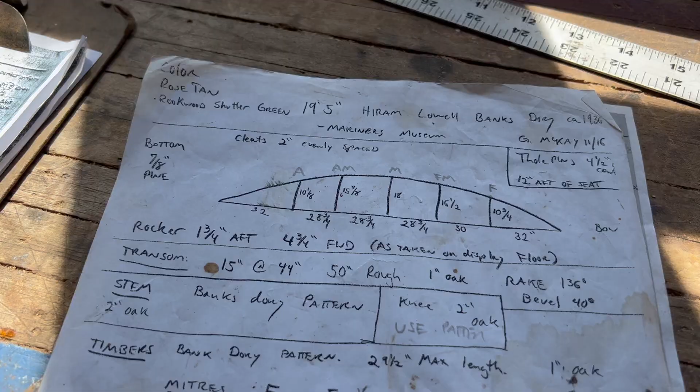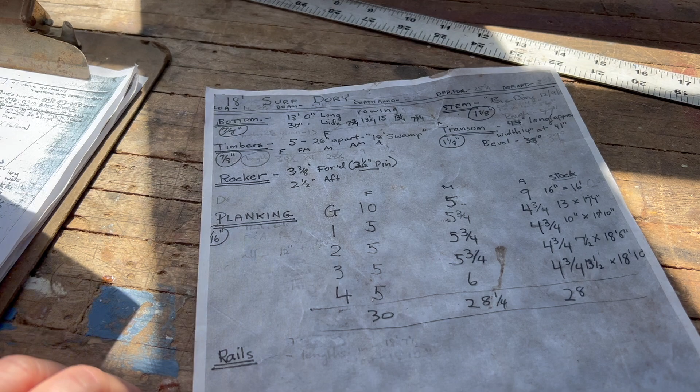A typical sheet full of notes. This is one that I made for a Banks dory. That's one for a surf dory. That's a little bit more like it. There's not a lot there if you're going to build a boat, but all of our in-house design boats are all flat bottom, and they're built the same way. So you start with a bottom.

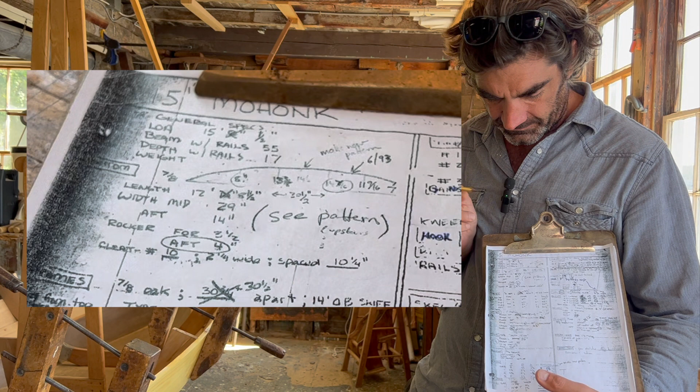Here, it gives you the general specs, length overall, 15 feet. Used to be 15.2, but somebody crossed it out. Now it's 15.5 inch. But there's a Mohonk pattern, it says here. So you don't even have to worry about this. You can go to our little pile of patterns and find the bottom pattern for a Mohonk skiff, which we can go do in a minute if you want.

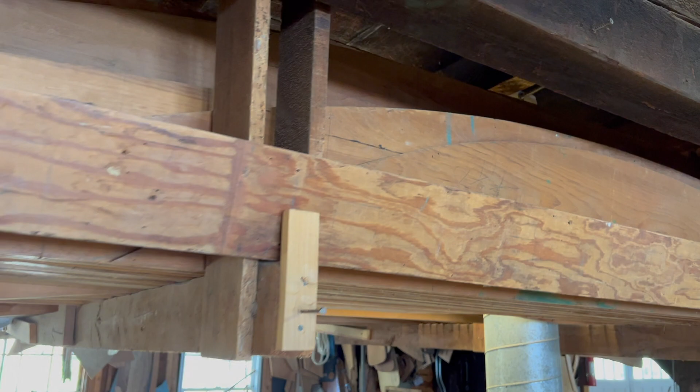But if you can't find that pattern, which is quite possible, you can lay it out here. It gives you the stations, the distance between, and a distance out from the center line. So you can lay out a center line, lay out your 30.5 inch between each station, come out the half breadth, bend a batten, and now you got yourself a bottom. Pretty straightforward. Tells you bottom is 7/8,

and your length. They gave you your length already. Your length is 12 feet. Sorry, I'm reading it upside down. 12 feet and a half inches. Your width at midships is 29 inches, and your width aft is 14 inches. Then it has, this usually comes later, but your rocker forward is 3.5, aft is 4. That's actually quite a bit of rocker, I would say, for one of these boats.

And that means this bottom is curved fore and aft this way. So you're going to take the bow and bring it up 3.5 inches from the baseline, which is the building bed. And then the stern, you're going to bring up 4 inches from the building bed. The middle is going to touch the building bed, and when you spring that in, that's your rocker.

Frames, they're going to be 7/8 inch oak, 30.5 inches apart. And then it says 14-foot OB skiff. So that means at some point they built a 14-foot outboard skiff and they developed a frame pattern for that. And so you're going to go over to our pile of frames on the wall. You're going to grab 14 OB skiff, and you're going to lay out a forward timber, a mid 1, a mid 2, and an aft timber.

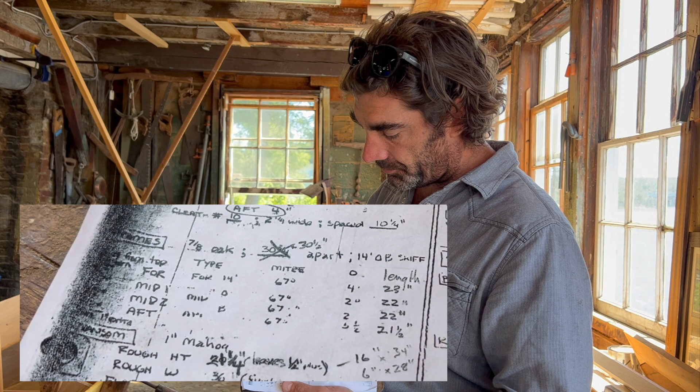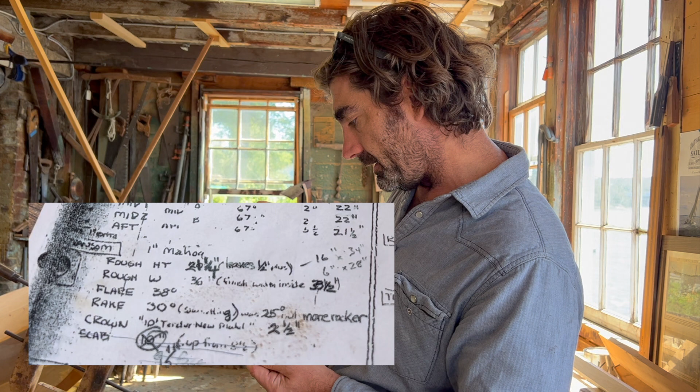And this gives you a little bit of spec on that. Lengths. It even gives you a bevel to put on the bottom so that these frames are canted out from center, so that when you bend the rocker in, they actually come back up to plumb. And then the transom. It gives you 1-inch mahogany, gives you a rough height of 20.75, a rough width of 36. So you need roughly that much width and that much height on it.

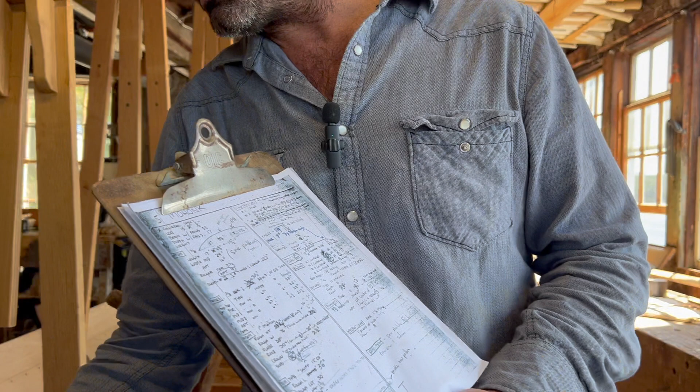Flare, 38 degrees. So the flare is this angle that runs out from the bottom up the side, at least for the garboard anyway. Out from the bottom, up from the side. There's your flare. And then it gives you the rake, 30 degrees, which is the angle that the transom is tipped back, is 30. And then it gives you a crown, 10-foot tender, new pattern.

So that means we actually have crown patterns for the shape of the top of the transom over on the wall. So that's what you're going to use for that curve. And again, these boats are meant to all look the same. If I were building one of our other designs, this information wouldn't necessarily be there. I'd have to figure out what pattern I wanted to use, and that would have been to my eye. And to that end, when I see boats that were built here in the 70s and 80s and even 90s, I can tell who built them, usually from the little details like that.

Stem type: skiff, 14-foot OB. So now we're back to that outboard skiff again. We're going to go find the stem pattern for that, which hangs on the wall over there. It's got a rough length of 36, a rough cut of 30.

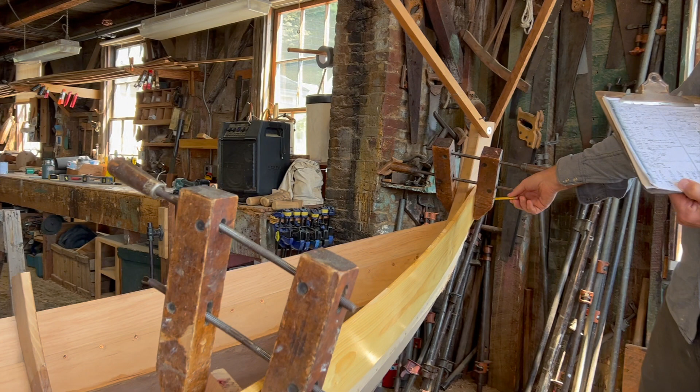So that rough cut of 30, and again, we're going through a lot of information. You come up 30 inches from the bottom and you make your first cut, and that is going to be your bevel for your planks to that point, and then you custom fit the shear plank when you go to put that on. So 30 inches is going to leave you below the shear a little bit.

Planking, 9/16 cedar. Well, that's high hopes. Can't find cedar like that anymore, so we're making it out of pine. 1-inch laps, 24-inch gain. Lining. Now, this is the magic. This little guy here is our lining for middle aft.

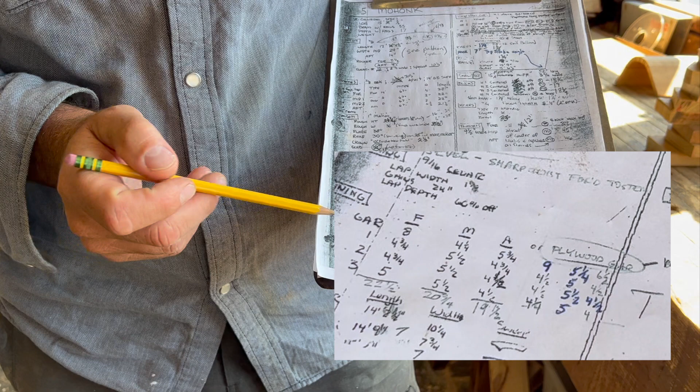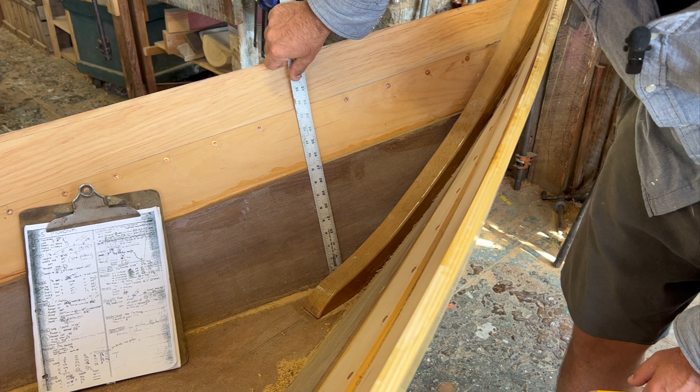You get all these numbers. Then you have plywood garboard, a whole different set of numbers. In our case, we're using a plywood garboard. And so if we take our little yardstick here, we should be able to read plywood garboard, 9 inches, and that's forward. So this right here should be 9 inches up from the bottom.

If we go to the middle part of the boat, 5 1/4, this measurement here should be, fingers crossed, 5 1/4. And then if we go aft, 6 1/2. I'm going to presume John did it right because he's good like that. 6 1/2. So then that gets you 3 points to make the top edge of your garboard. The bottom edge is determined by tracing the bottom of the boat.

Your next plank comes up, it overlaps everything. You trace the top of your garboard, and then you just add. So in this case, the next plank's 4 1/2 inches wide up forward. I'm going to add 9 and 4 1/2. It's going to get me 13 1/2. Lo and behold, 13 1/2. Sticking with the same one, another 4 1/2 would get me to 18 inches. 17 1/2, I hope. And 4 1/2, 4 1/2, 9.

So this one ended up a little bit low, but that's not a big deal. Actually, it didn't if you put it at the proper angle. But that doesn't matter because that's why I add to the previous number so that it's self-correcting all the way up. And then when you get to the shear, you get your 3 points. And you always try your shear line out a couple of times before you actually make it to make sure that it actually looks good on the boat.

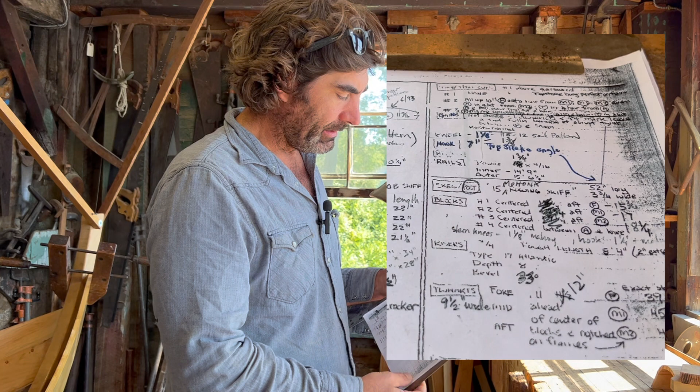So now you've got your boat all planked up. Pretty easy. There's a whole mishigas of timber cuts here, and we've sort of gone through that, and I'm not going to go through that again, just because in this particular boat, it's quite complicated. And then it gives you a whole bunch of information here on how to do the rails, how to do the rowing blocks, the risers, and all that kind of stuff. Again, that stuff typically does not exist on these. It's just so these boats all look the same. But the general gist of how to build these boats is all in those notes right there.

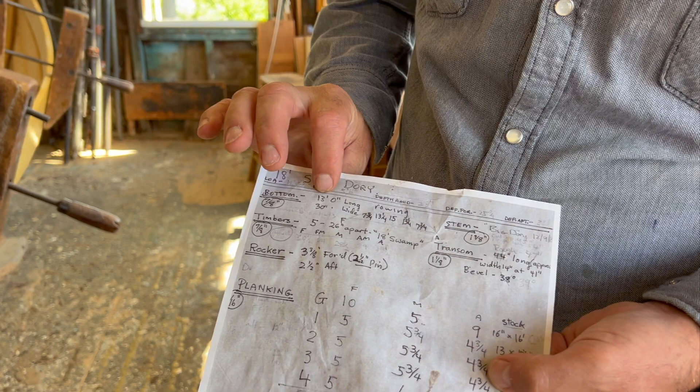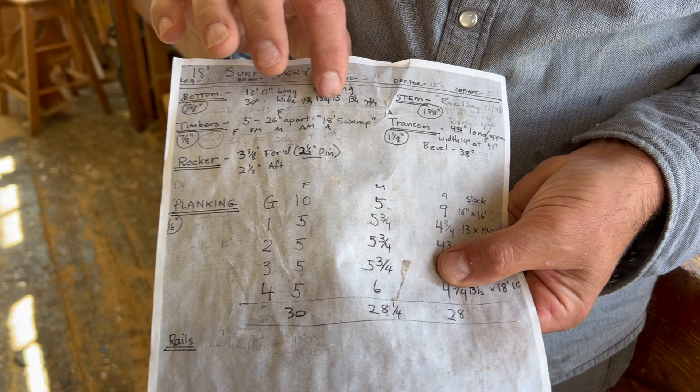And so in the case of our 18 surf dory, we would know that the bottom was 13 feet long and 30 inches wide. It's really all you need to know because it's football shaped. So at 6 1/2 feet, you come out 15 inches on either side, and there you got your shape of your bottom. Your stem is the big dory stem. Your timbers are 18-foot swamp. You've got 5 of them. Just follow the patterns, and there you go.

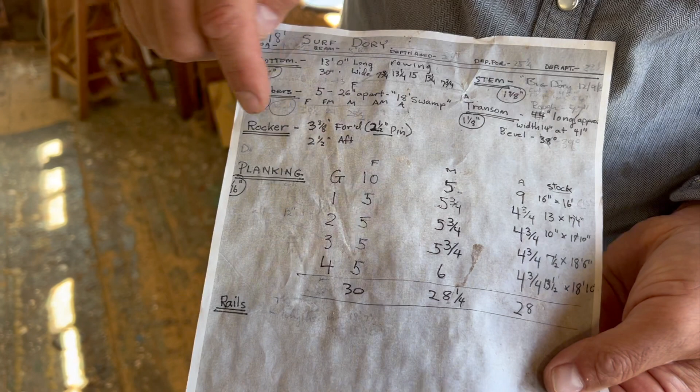A couple of measurements for your transom. Got your rocker. Now your frame's all set up. Here's your lining for your planking. If you follow that, now you're all planked up. And the only thing that leaves you is some information for the risers. Everything else you kind of have to make up on your own. But that gives you essentially the hull, and then you kind of go from there. So a super simplified way of building these boats.

It works because we do have patterns. We have patterns that don't have notes, and we have some notes that don't have patterns, and that's unfortunate. We have historic patterns in the collection in the attic for which we don't have any notes. We have some sticks that correspond, but unfortunately, the Rosetta Stone for all of that would have been an old boat builder who had built 100 of these boats, and they're no longer here, which is really unfortunate.

One of the benefits of doing it this way is that the process is extraordinarily malleable. So if I want to make this boat a foot longer, I can scale up this bottom and do the rest the same, and it all comes out and looks beautiful. So you can stretch boats, you can shrink boats, you can make them a little wider, a little bit narrower. And a lot of that is to the customer's orders and what they really want.

Sometimes with the timber cuts, I'll alter those a little bit. If it's going to be a sailboat, sometimes I'll lay the planks out a little bit more so that it's a little beamier, a little bit rounded. If it's going to be a rowboat, sometimes I'll stand them up a little bit so that the spread of the oars ends up being an ideal width, that kind of thing. But a lot of that's left to the builder, and a lot of this information is guidance. But you can kind of mess with it as you wish.